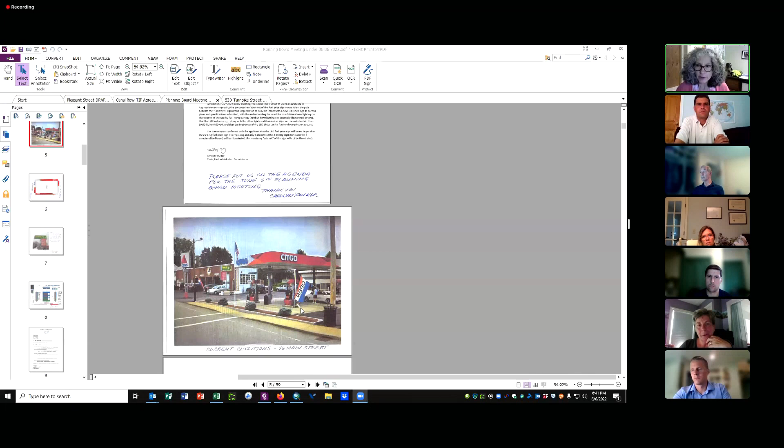So you'll recall in the last meeting, they showed a canopy and showed a rendering or an image that showed this lit up at night, and this was all lit along the top here and really appeared to have quite a bit of visibility. Right, so that's all gone.

And they're replacing this pricing sign, which is set quite far back from the roadway. It's just very hard to go out there and change these prices, especially the way gas prices are changing, he has to get a ladder and all that. And pretty soon you're not going to be able to even find these numbers. Like I said, at the historic meeting, I'm surprised he found 4 4's like that, you know what I mean?

To have this, and now he needs a 5. Oh yeah, the new signs have space for additional digits in case. So this way he can change it from within the building, you know what I mean? And like I said, it dims. If I think they put in, if they feel it's too bright, say there's a 10 being the brightest, you really can't go below 3 or you won't see it. So you have that range if someone goes 'oh my God,' but it can only be dimmed so much.

But now, are any of the existing signs attached to the canopy being changed? Well, it's just a new image. It might look the same to you, but Citgo says it's different. But either way, they're not illuminated. No, they're not going to be illuminated.

Do you have some downlighting? No, nothing. So there's no downlighting on the exterior of the canopy? No, just the existing lights that are under the canopy. Okay, yeah, I saw them the other day. So the illumination will maintain the same illumination that's currently there. Board members, do you have any questions?

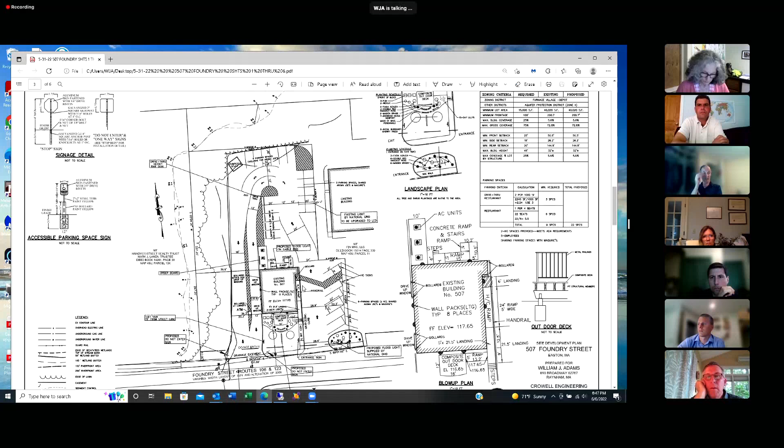I do have the specs of the light we're proposing, and I have submitted them. We're proposing a new light at the entranceway, down on this pole here, which would light up the entrance area. Again, it's an LED, and I submitted a cut sheet for that fixture as well. I can pull it up if you want to see what it looks like. No, that's okay, I think we understand.

Okay, and then on the building itself, there's what they call wall packs—they're like sconces, they shine downward. We have two on every wall, shown on this plan. If you look at the blow-up plan adjacent to it, it's twice the size—right here, to the right, that's showing the wall sconces.

This ramp has a soffit overhang, and we have some recessed lighting in there to light that ramp up. There's also recessed lighting at the entrance and at the rear entrance that lights up the landings and the stairs and so forth.

On the front of the building, we have lights—I don't know the exact name—but they hang down, bell-shaped. Those are shown on the other plan; I didn't get it on the blow-up. Let's go to the other side, same sheet 3, over here. Yeah, just blow up that area.

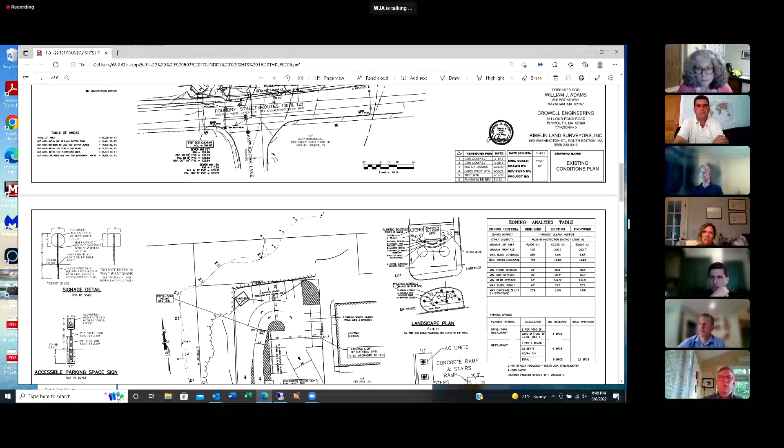Okay, so there are three lights out there that'll hang down and light up that outside seating area. That was one of the things identifying all the light fixtures. Then there are also plantings up in the back—we have the planting schedule, which I also submitted from the landscaping company. I've uploaded that, and they're the same as identified here on the plan.

Then I believe the last thing was there were concerns with the asphalt, so this last plan is a paving detail. Presently, we have this portion removed to put in the grease trap and to take the canopy off, and all of that.

Throughout the property, there's between 5 and 6 inches of asphalt. Any place that there's an issue with any asphalt, I am planning on removing. There's cracks in the asphalt at this entranceway, and they're not cracks through the entire 5 or 6 inches.

They're surface cracks, so I plan on grinding that asphalt and then replacing it. The other thing is the surface that is showing the cracks that Greg was concerned with—I'm not sure he knew that it's only about 3/4 of an inch thick. The rest of it is like 5.5 inches of base. I don't know if it was asphalted twice, or if they just put down this enormous amount of base in there.

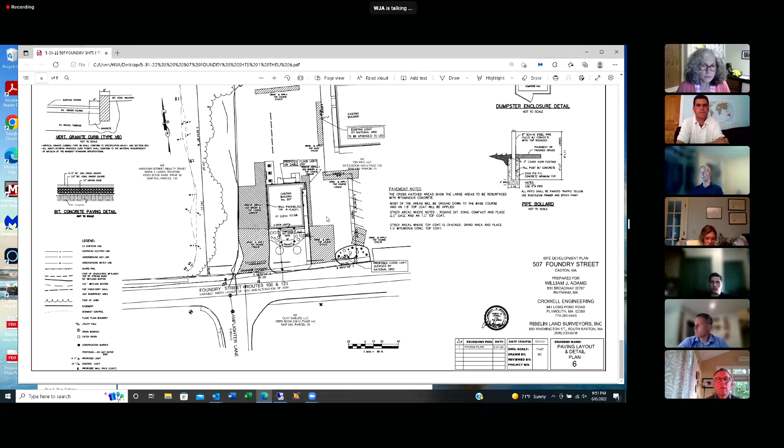But the majority of the blacktop is in good shape. There's just certain areas, so where the hash marks are, we're planning on cleaning that out, grinding it up, and putting a base down, putting a top coat down. If the base is bad, when we dig it out, we will dig out the rest of it. So anywhere that is even questionable—I have over a dozen properties, and I don't let my properties, I don't have them with bad asphalt.

I don't let them get run down and deteriorated. I want my tenant to pay their rent. I want them to do business, and I want the place to look well, look the best it can look. And I think I'm expressing that by what I'm doing for the build out.

I didn't have to do half the build out that I'm doing. I've taken this building and I've increased my build out probably by $100,000, and probably between $200,000 and $300,000 by the end of the day of what I'm doing just to the building alone. So I'm surely not going to allow—I think we're very close here anyway—a pothole parking lot to hinder my project.

And over on this area here, this goes into the neighbor's property. I'm going to fix that property, I'm going to fix his too. At the same time, any place that looks bad on my property, I'm going to repair. If it overlaps a little bit, I'm going to repair that as well.

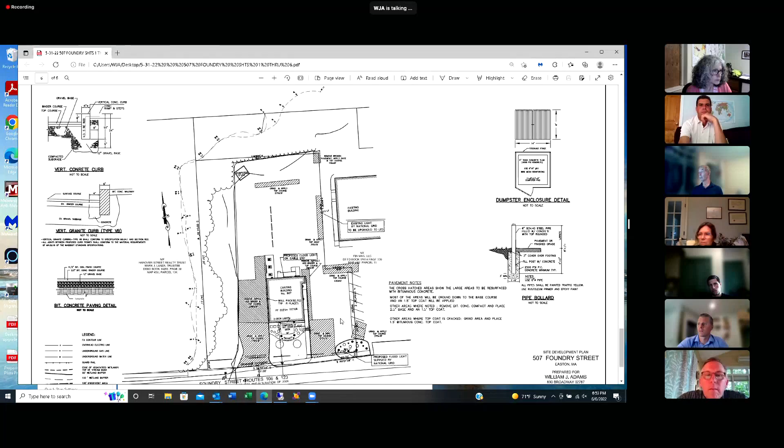Bill and Neil called me or sent me a text this morning and asked me who my asphalt contractor was, that he'd like to possibly do some improvements himself. So maybe he's going to see mine's all nice and new and shiny, and he's going to make his place look equally as well. So that's, I believe, the concerns that the board had previously, and I feel like we've addressed them all.

If there's something else that I haven't addressed, if you could please let me know or ask me, I'll be more than happy, or Bob would be more than happy to explain. Yes, definitely, I think that was most of the items that we had. Yes, so after the meeting we had the location of asphalt to be cut and repaved.

I do have, if you want to see the other planting documents that I have, I had an engineer prepare a photometric plan. May I finish? That, Bill, I have as well.

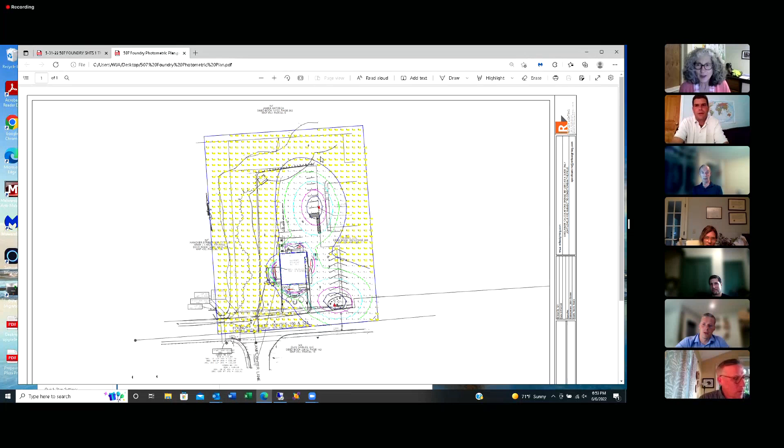No, yeah, Stephanie has the floor. Let's let her—No, I don't think he can hear us. I thought that Greg wanted—

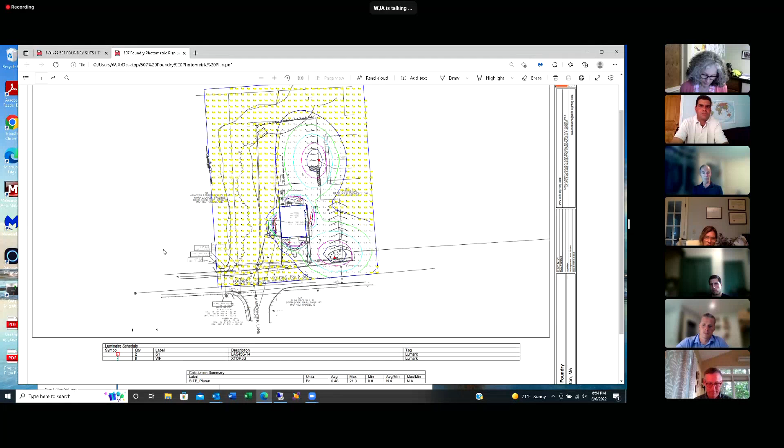I don't know that it was necessary, but I did it anyways, and it shows. Also Greg had said we need to know if the light's shining in the neighbor's eyes. Well, behind my property is all woods, to the left of my property is all woods, and my lights are facing in the westerly direction, so they're not shining in the other property's eyes. And the lights are shining down.

Okay, so I have a question on that, if I may speak for a moment, please. What are the yellow symbols indicate?

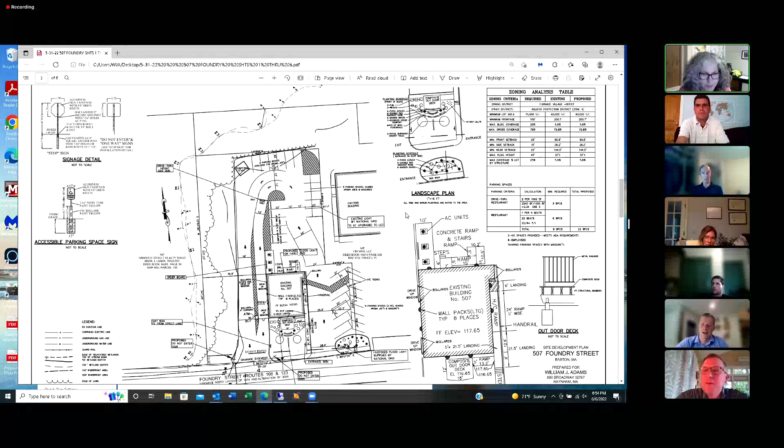The other thing we did was we took the word 'illuminated' off the plan, Mr. Adams—which seemed to be a concern. We removed that wording from the signage. My understanding is the sign company is filing all their permits, and we're going to come before the board for the review of the illuminated signs, and they're also going before the zoning board for a variance that they need.

I just put him on hold. I didn't think he would just continue to talk over everyone like that, but that makes a little more sense that he would—I don't think he could hear us. Bob, yeah, I don't think he did it either.

Okay, so Peter, we provided the applicant with a list of all the items that the board was looking for. I'm not going to go through the whole list—they have all been addressed.

Yeah, that's great. And Bob, do you know what the yellow marks indicated on that photometric plan? Yeah, that's the amount of light that shines on each area. Okay, but I think yellow indicates where it fades out, doesn't it? Yeah, the yellow looks like it's anywhere under maybe 0.2, or de minimis. All right, board members, do you have any questions? 0.0 and 0.1, so Bob or Bill?

Oh, I don't think Bill's with us anymore, but no—oh, I mean, I was just going to release him.

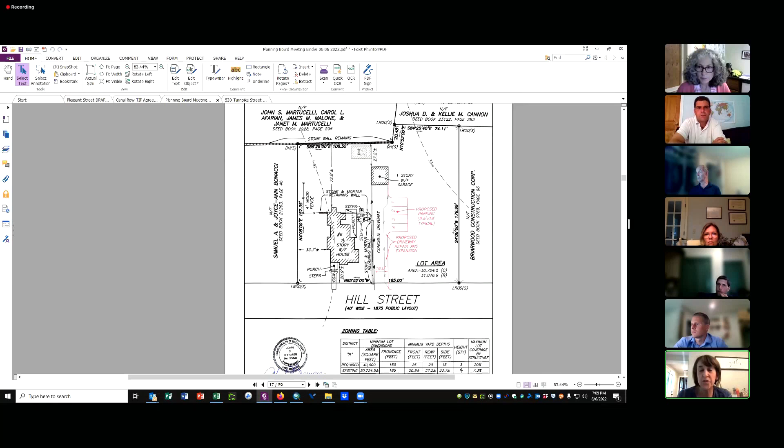Okay, now what were the changes to the driveway? It looks like they've added the parking here off to the side and are expanding the driveway, taking out the shed that you guys spoke about last time. We're just going to remove it, so it's not even an issue.

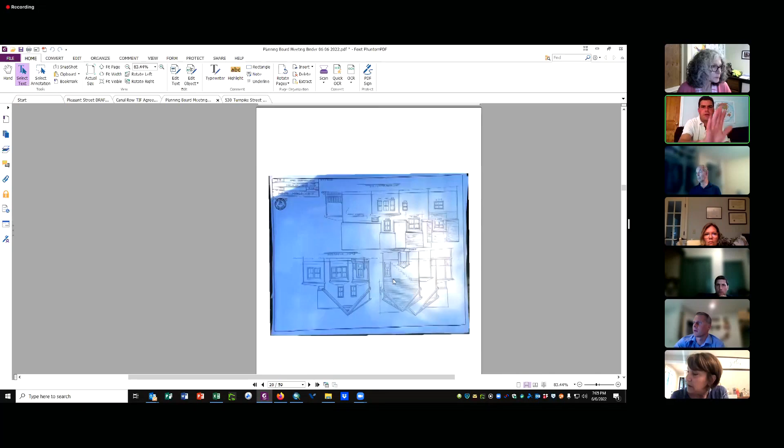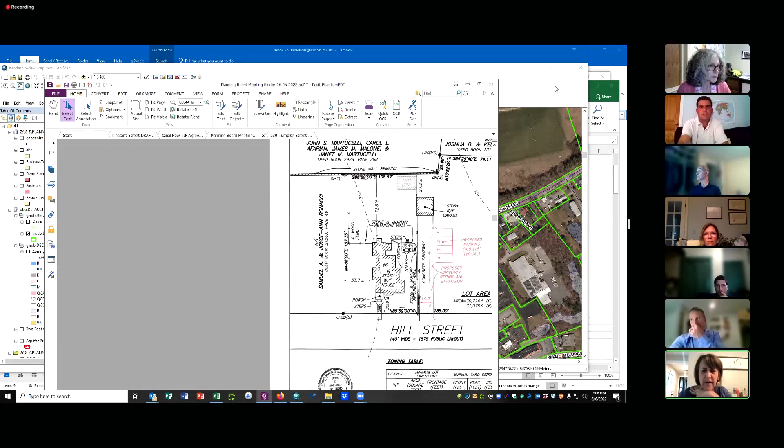Okay. And can you remind us, I could go to my Google map, but on the other side, if you're facing the house from the front on the left, there's some existing trees or bushes over there? Yeah, I think there are some bushes on the left, some privacy between the two homes for sure. And then beyond the parking there's still a lot of grass on the side, before you see the other house. I'm really on the spot here because...

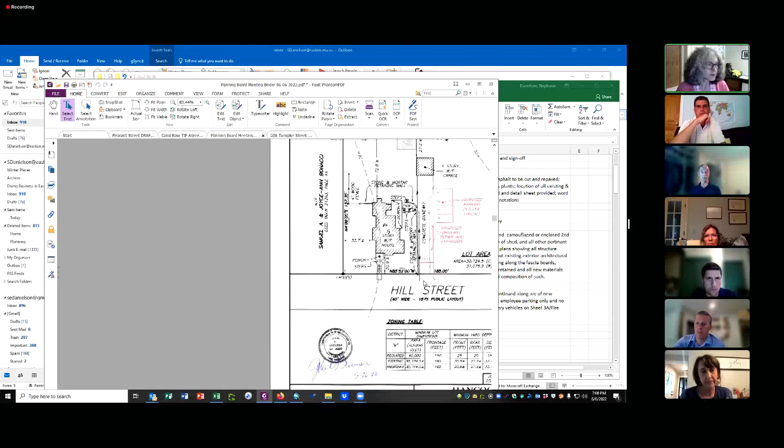So we can move on, and if Nelson comes back he can tell us more. Stephanie, do you have any updates on this? No, they responded to the questions and suggestions of the board. One thing the board asked for was to revise the plans to show the relocation and camouflage of the second enclosed entrance, and we'll look at the elevations in a minute. Also to revise detailed elevations showing all structures, identifying elevations, calling out existing exterior architectural elements such as the crown molding along the fascia boards, windows, wood siding that will be retained, and all other such information.

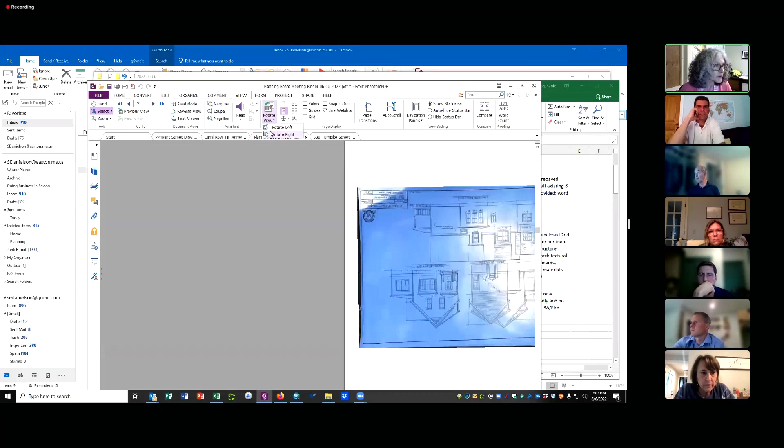The elevation shows some of that information, but it's not there, I don't feel like there's a lot of detail. I don't know if the board had an opportunity to look at the plans. Again, I'm trying to rotate this. Yeah, I did, and I zoomed in, but I wasn't sure, it's a little difficult to see. As you can see, it appears to be a blueprint and a copied blueprint, so it's a little difficult to make out. He's planning to leave as much detail as he can.

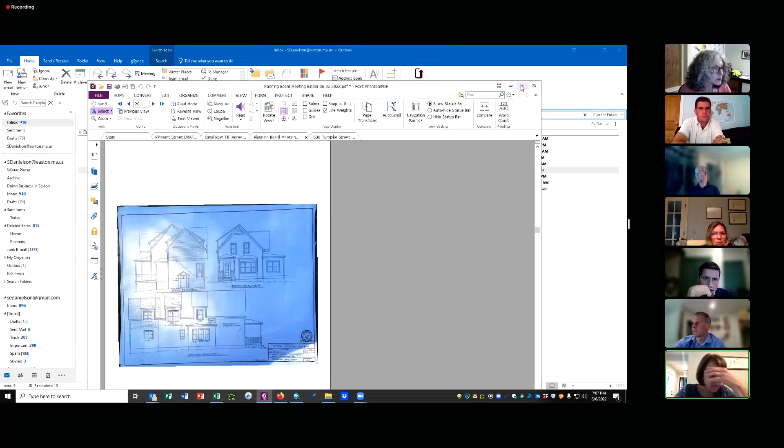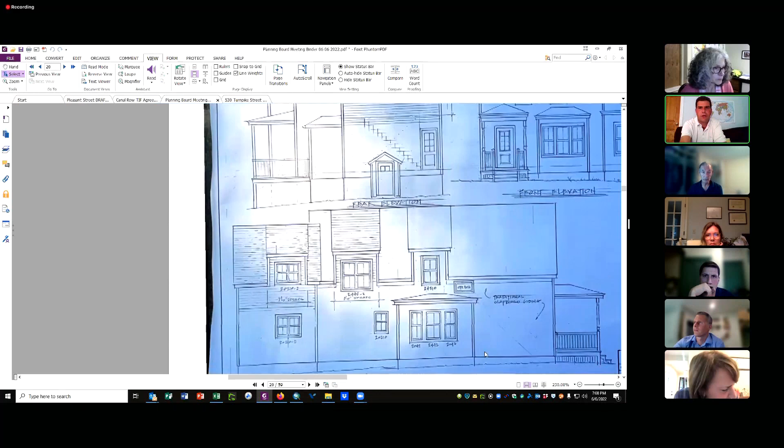With the old woodwork and fascia boards and things like that, are you able to speak to those suggestions, how you're going to handle it, what materials you'll use, or would it be better to speak with Nelson about that? I don't know exactly the kinds of materials he'll use. Well, I think when you look at Stephanie's comments and the historical commission's comments, there are suggested varieties of materials that are options. I'm sorry, I didn't hear what you said. I think looking at the historical commission's comments, they suggested the possibilities of different materials you could use. I'm not sure if you made a decision. Yeah, I don't think he's made a decision because we're waiting for your decision to move forward with what materials he'll use. I really don't know.

All right, okay. Well, board members, do you have any questions, or should we talk about the architectural plans a little bit?

I'm sorry. That's okay, I thought it was pretty genius putting the staircase there, and it worked. That's okay, we're just kind of deliberating here among us, not by ourselves, but opening the floor to any board members.

Okay, so I just got a message that he can do wood shingles and wood siding if that's needed. He says it does say it on the plans, wood shingles and wood siding. He's on speakerphone, so we can find out if there's something else specific.

Mr. Chair, if I may, I know that was something that at least Greg was looking for, and I think other members too. So Pam, we're going to put the wood siding, we're going to keep the same architecture of the house.

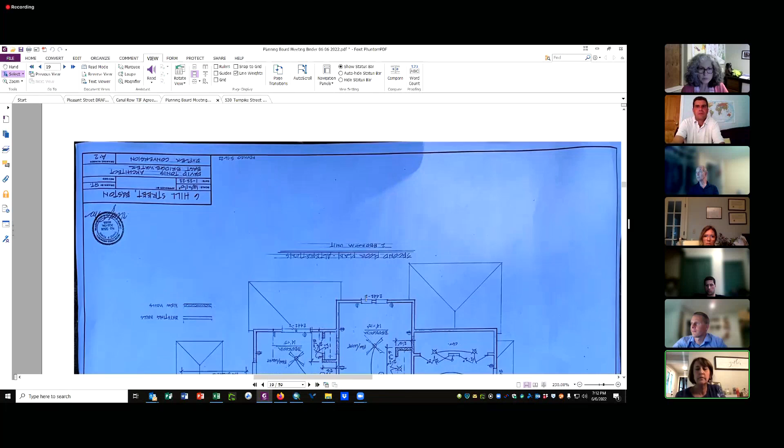Sure, okay, and it looks like your windows will have some sort of representation of window panes, whether or not they're actually paned windows. So right now, the pre-existing windows, some of them are original windows, and some have been replaced with vinyl replacement windows. But what we want to do is put in a new construction window, keep the trim work on the outside the same, and put grid work in the glass to try to imitate the same feature the house originally had.

And then the front porch, the railings and the balusters, are those composite or wood, or what material? On the outside right now, the railings are wood, pressure treated, which need some real attention. So I'm planning on the back going back to pressure treated, just replacing them because they need to be brought up to code. But the front, I'm going to reconstruct that whole new thing with mahogany decking like you used to have, with the railings and everything.

I've actually done one on 42 Columbus Ave a few years ago. I think mahogany, if you take care of it once a year, just brings a beautiful feature to the home. Okay, that sounds nice.

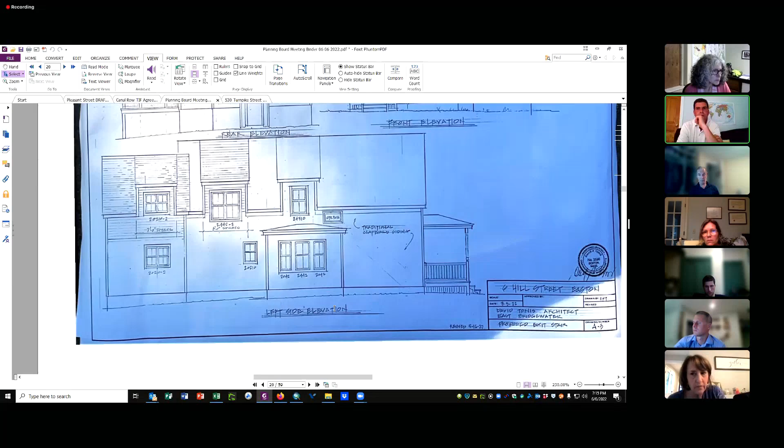But I'm just asking, not just material wise, but the actual structure building. Like, for instance, the addition - I see that the addition is lower than the main peak of the house, but there is no dimension.

Okay, but otherwise, I'm relatively satisfied with the changes made thus far with the architecture.

He's addressed. Wait a second. Nelson, hold on. Can you hear me? Okay, you need to hold on. All right, Deb, go ahead. Continue. So Deb, besides that, I don't even know who was just commenting, but he was trying to address it. Okay, Deb's speaking now, so you can.

Since they're in relationship to some of the materials that were mentioned, it's just that it's not all put in the plan. It looks like there's divided lights shown in the glass, but it's not necessarily called out. So I'm just saying, if we were to make a motion without those notations on there, how do you know that it would actually get done?

Yes, but Beth, just hold on while we're speaking, if you could just wait your turn, that'd be helpful. Thank you.

Yep, I see what you mean, Deb. So what do you think is a better idea? To request more detailed plans, or just add some conditions to any possible approval?

Well, I think ideally in the past, typically I feel like Greg would usually say that we request that information to be on our plan, but again, I'm not sure if everyone feels that it's necessary, or if in our motion we could just...

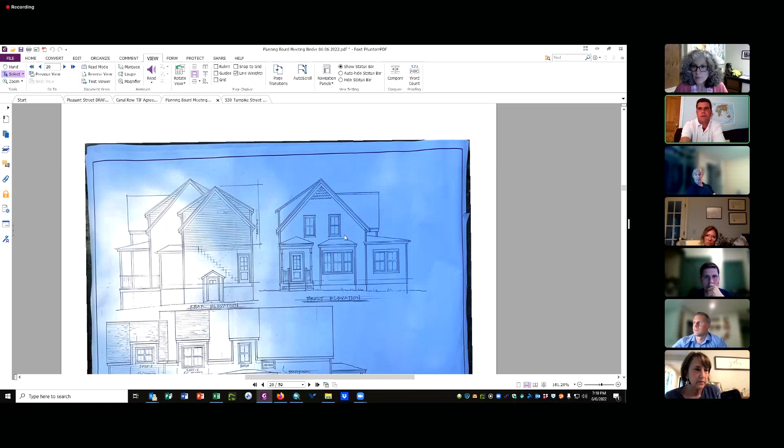Okay, yeah, I think those are some good suggestions. Stephanie, did we have one of the... oh yeah, hold on, let me stop. Waiting to speak. Screen.

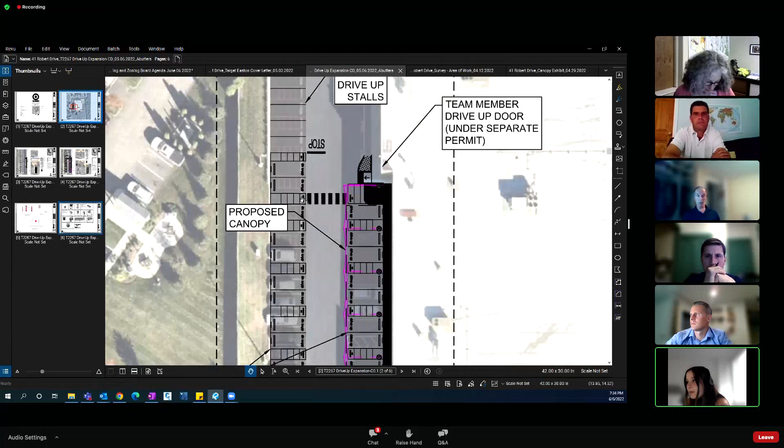This is an aerial of the site, and we did over this so you can see the existing spaces beneath it. There's only a few, and we're going to let it expand down. Anywhere there are spaces no longer going to be used, those will be sandblasted and restriped as standard spaces.

These are the proposed locations, and between every 2 spaces there's this loading area. It's like a walk aisle for the employees that come out and deliver the goods to the cars. This magenta indicates a canopy. It's really just meant for weather conditions and to help protect the employees when they're bringing anything out to the cars, and I could pull up an exhibit so you can see what it looks like.

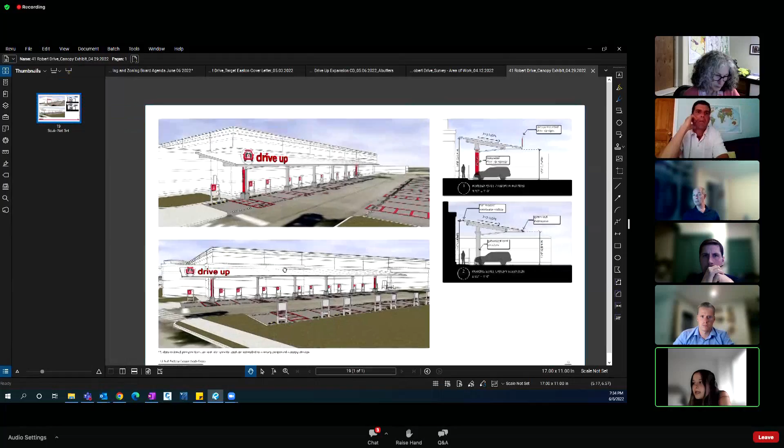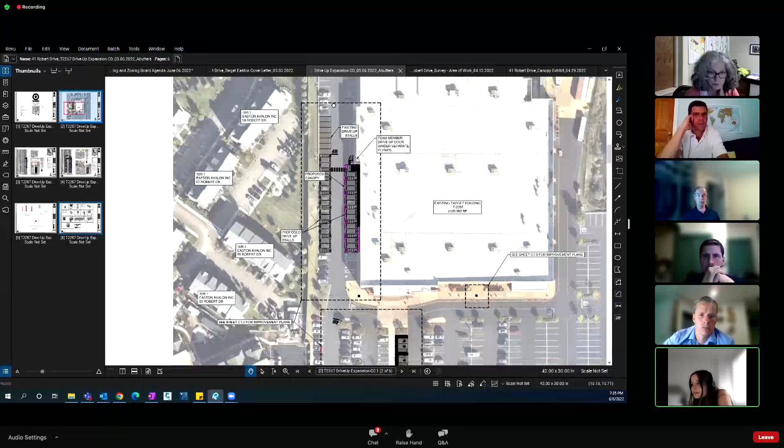So this is just a visual of what we're proposing. There's going to be a drive up sign on it, but Suzanne filled me in that that's something separate I'll have to get other approvals for. But yeah, this is pretty much an overview of it. Sorry, I'm just clicking back to this page. There's going to be all the traffic control that's needed - stop bars, stop sign over here.

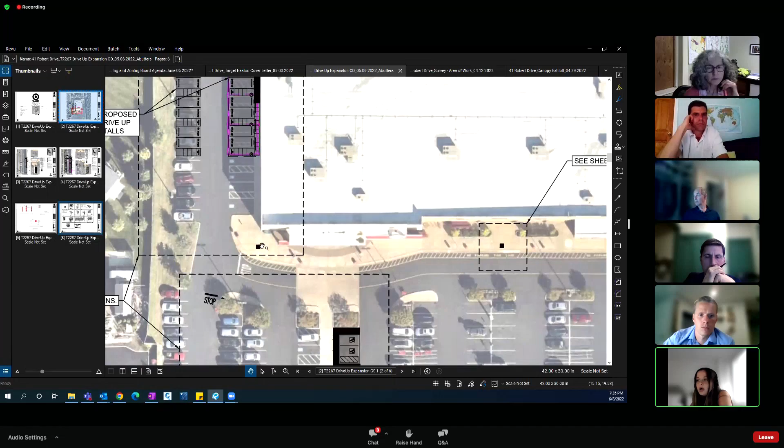And then these 2 black squares represent - let me pull it up - they represent this blade sign. It's actually, this is incorrect, it's not internally illuminated. These are just meant to be directional signs to help customers find the drive up on the left side of the building, since you can't really see that from the road. So these will be at the front of the building.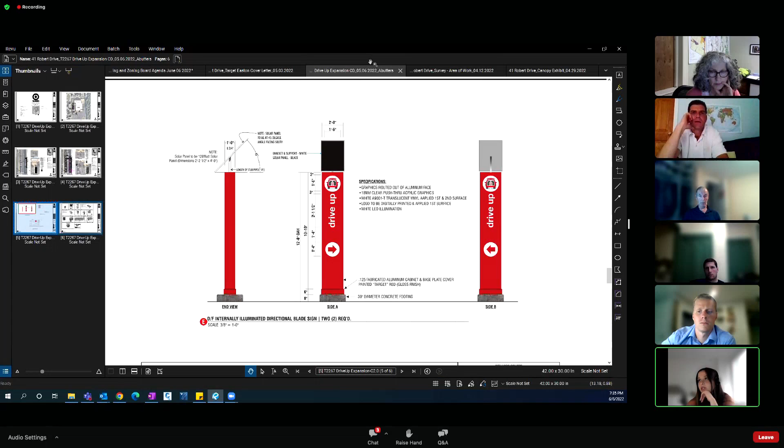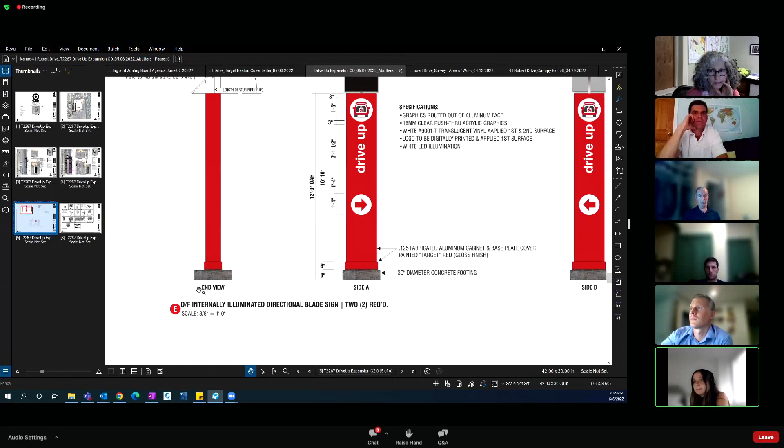And are those drive up signs illuminated or not? No, they're not - sorry, this is incorrect, I just realized, but it's correct in the sign plan that I'll be getting approved later on. But yeah, they're not illuminated. So that's kind of an overview.

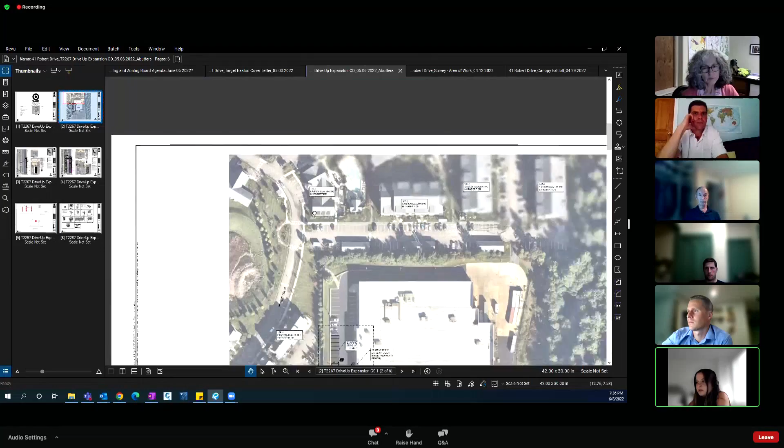Sorry, I'm kind of jumping all over the place. Do you guys have any questions? And just like the existing traffic pattern for that section remains the same, right? People just pull in and pull into a spot, and then they go the opposite way to exit, right? Yeah, so it's about a 2-minute turnover rate once you actually pull into the space.

And do you have the new ADA parking spots on the plan? Yes. Okay, right. So they're going to be moved over here. This is the existing landscaping right now, and they're going to put the ADA spots here.

And then the previous pickup area is just going to be restored to the original parking. It's over to the right, the existing pickup spot. Isn't the existing over to the right? The one time I went there, I had to wait a while. It was over to the right.

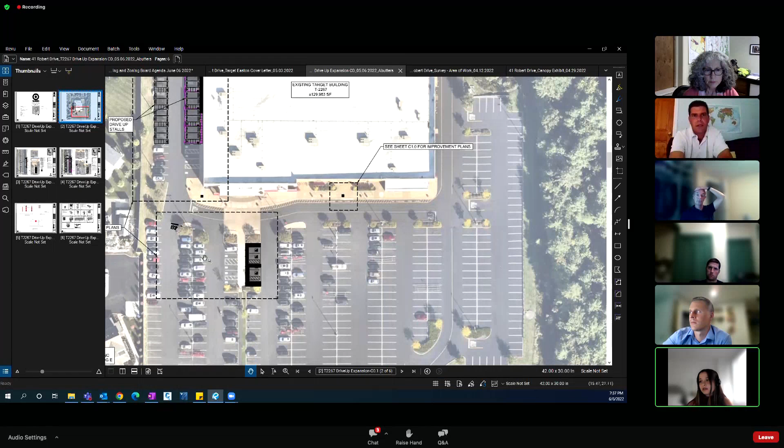Yeah, but maybe more than one spot. It was sort of right. Right around there, but in those parking areas there. Oh, no, well not there. No, not in the front, like to the right of the front. Now you go over a few inches - like over here, you're saying? Up, all the way to the other side. Yeah, right around there, towards the front ones.

That's where we went and they dropped it off, but looks like you're stating that those will be restored to regular parking spots. Yeah, there's none there existing that I know of. I don't believe there are, unless maybe there's 2 targets in Easton - this is South Easton, so I'm not too sure, but these aerials are usually pretty up to date because we use a special... sorry, what was that?

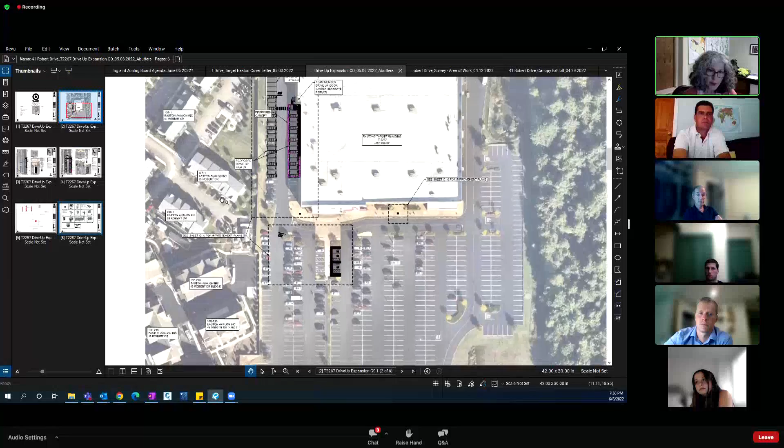We can go with this. Stephanie, did you have some comments? I did have a couple. One, they used the aerial, so it made it a little hard to read, but they did not identify the abutters. I talked with Casey about that - I think she was submitting a revised plan that showed the name and address of the abutting properties. Yep, I can see that there. I resubmitted them, so yeah, we threw them all in. And then, let's see.

So on the signs, I did not pick up that the plan showed that they were illuminated. I think we need to see that eliminated from the plan. Casey acknowledged that she knew she needed to, when they submit their sign application, if they were illuminated, that would need to come to the planning board, and you're limited as to the number. Casey also acknowledged that the canopy sign.

I don't know if the zoning enforcement officer would consider that another wall sign. I think a case could be made for that, but that's for him to decide. So I would suggest you check in with him, Kevin Griner, the building inspector.

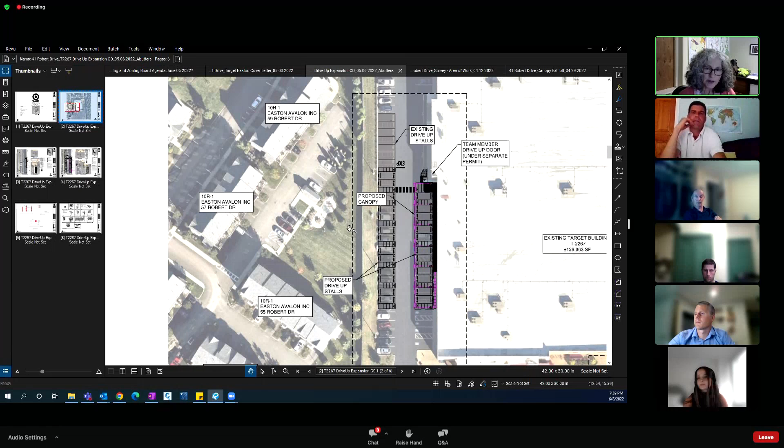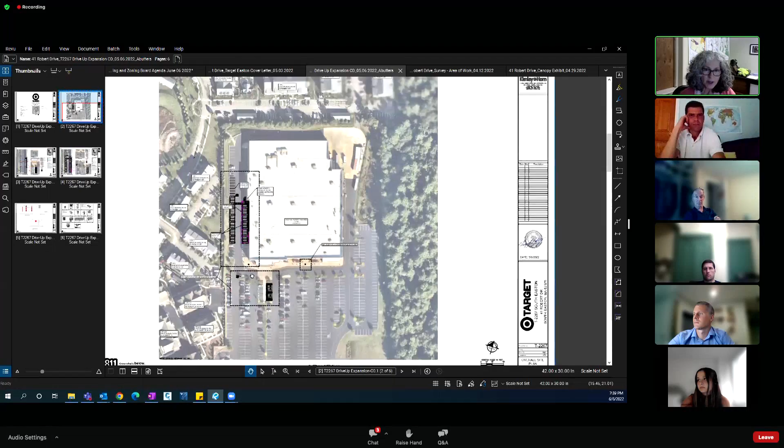My other comment was that they're replacing the ADA spaces that they're losing. They're replacing it where, Casey, if you could show this, where there's some landscape area. I mean, it's really not fantastic as it is, but if you zoom out, there's very little landscaping on this property, and I'm not even sure what the lot coverage is, because it's pretty extensive. This was approved many, many years ago at this point. So my thought was, if they feel that's where they need to put those spaces, the board might want to consider asking them to add another landscaped area to compensate for the fact that they're losing that. And that was pretty much it.

There's a comment from Captain Zalo that they would require a Chapter 34 review of the building code to ensure adequate fire suppression. There was a note in the chat that I think there was more project representatives here.

That's the next meeting. Okay, that's the next one. I think they were at the Conservation Commission meeting prior. All right, board members, do you have any comments?

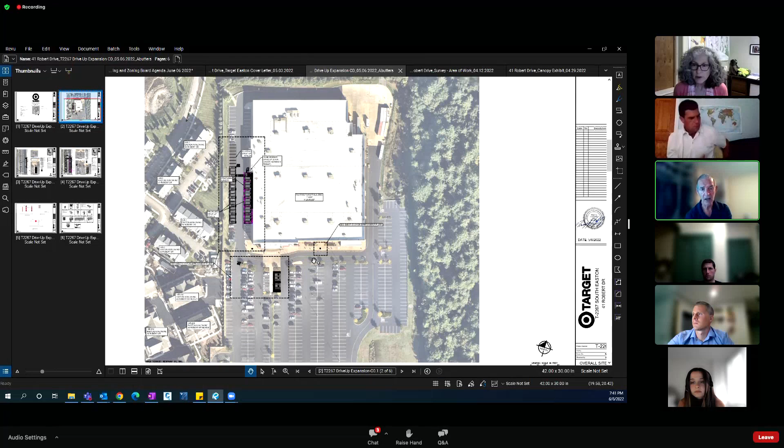I have a question for traffic safety. Is there any additional need for some signs for direction of traffic? It looks a little narrow, with cars in and out both directions. Is there a need? Should the police or someone approve the whatever?

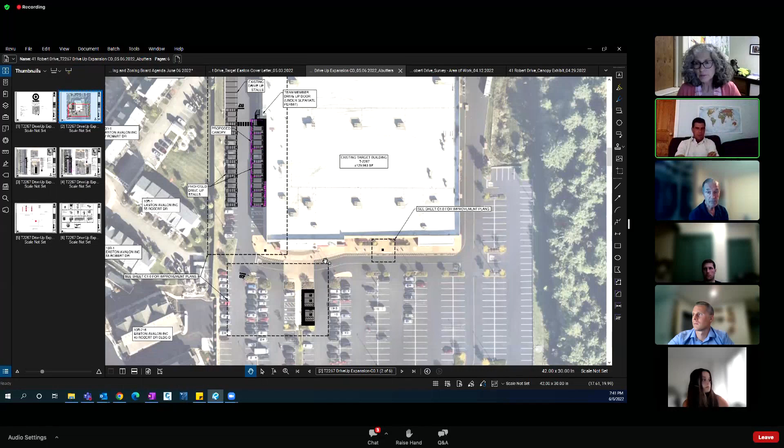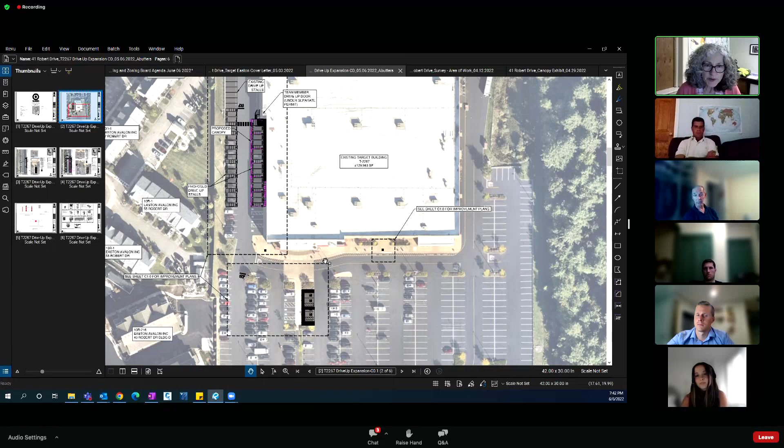I think that's just a typical commercial parking lane, that functions the same as a typical one. So I kind of alluded to that, but didn't ask specifically, but that was my feeling. And if I could respond to that, I looked at that too, and drew the same conclusion, that it's a typical parking lane where someone's either going to pull in, nose in, or back in, and then just back out and return the way they came. These spaces act as standard parking spaces at the end of the day. I think the benefit of this, and why you're losing spaces, is that they have this area between each of the two. That looks like the path where someone's delivering and providing some separation. It's easier to back up. Yes, yep.

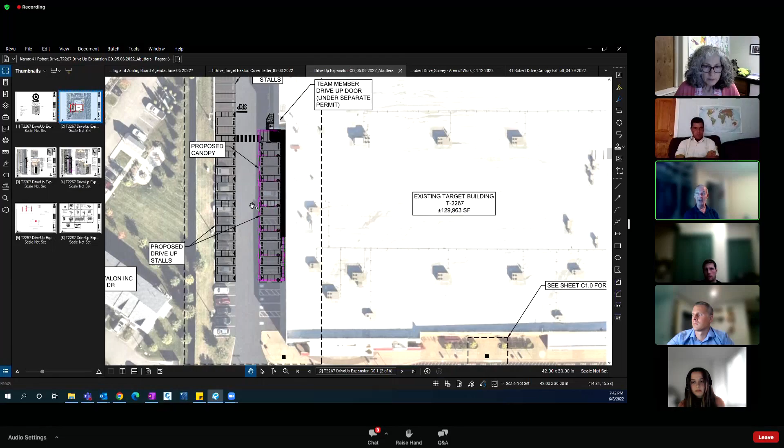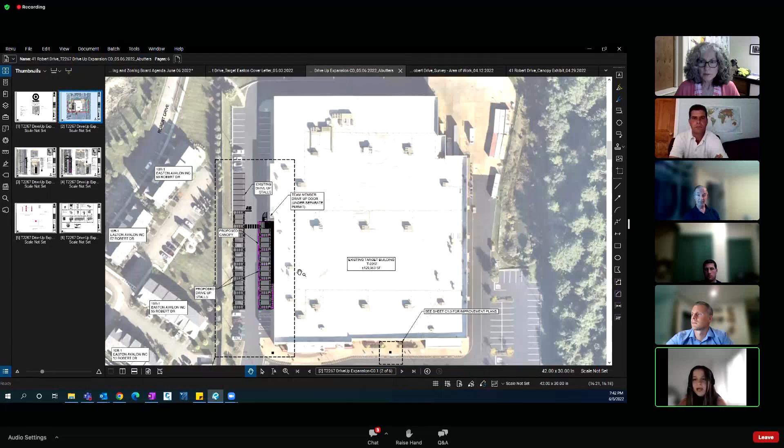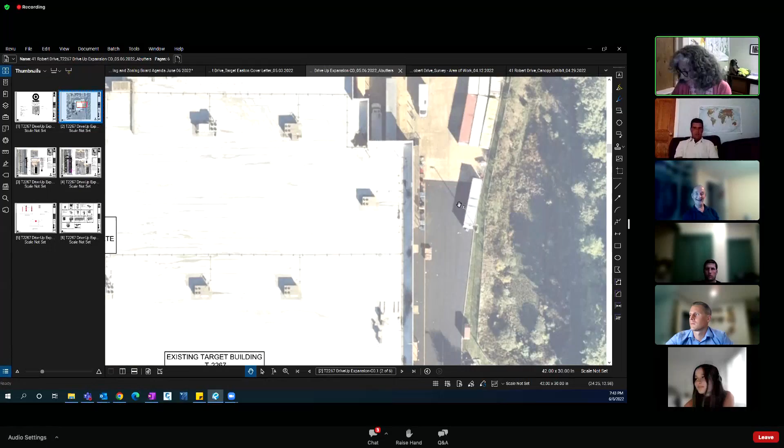One of the reasons I see is if you look at the aerial picture, you can actually enter from the other side and go around the building. But I think there should be signs there that that is not permitted, right? Sorry, what was the question? You were asking if you can't enter from the backside of the building? Yeah, you can actually go around, right? I don't know if cars typically drive around to the loading docks on the backside, but I feel like you could still pull in from the backside as well, especially with signs that say do not enter, loading trucks. It's actually pretty uninviting. I've gone out there to do inspections and thought about driving around, and you can see even from the surface of the driveway that it changes. I thought there might even be a gate there, but it looks like that tractor would be where the gate might be, though it's not someplace that invites you to drive. Yeah, if they ever do it once, they'll probably just go the other way next time. Exactly, they have space to turn around and find the easier way out.

No, I was alluding to signage that will help someone understand. Yeah, and that's also the purpose of these wayfinding blade signs, they'll have arrows on them. They're there at the front drive aisle of the building to help customers find where the actual drive-up is on the left side of the building. And they've seen a lot of success with that.

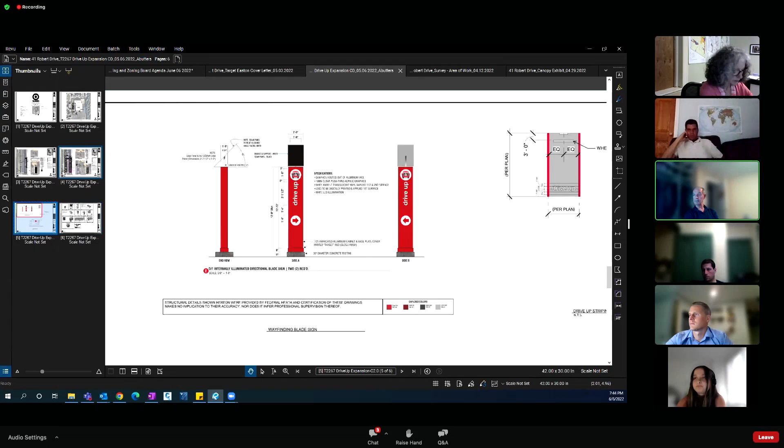So Stephanie, board members, do you think we need to wait for the final plan with these changes, or could we attach a few conditions that the final plan show some of the other details we asked for? I think that would be fine.

I'll definitely get a complete sign package that'll have everything correct in there. I submitted those comments to our sign vendor that we need to get those changes made.

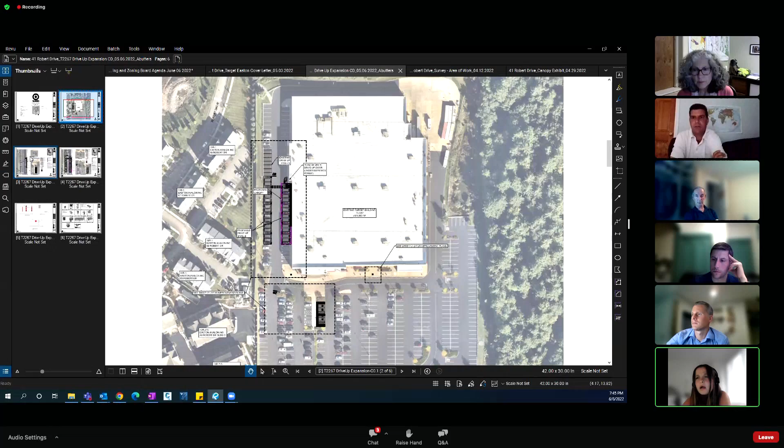We'd be approving the location of the wayfinding signs, right? But not the graphics. And the new wall sign is really its own separate entity, I guess we'll see if it's considered a wall sign since it's on the canopy, not on the building. That kind of starts with the building inspector, who decides how to handle that, and then if needed, it comes to us.

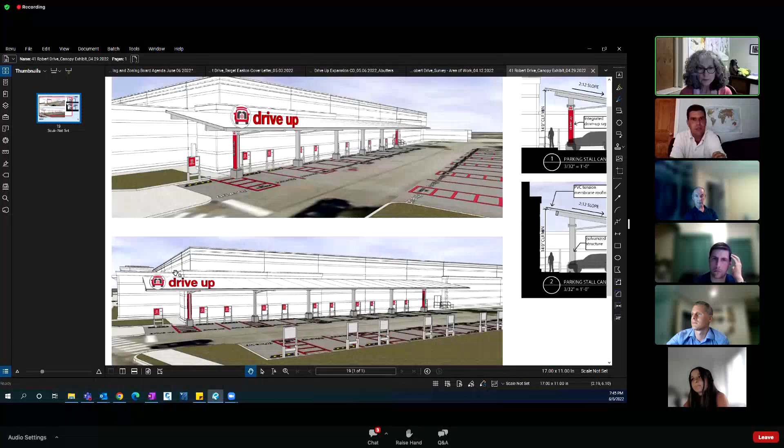Was there anything I need to get from the fire department? I know there was a comment about a potential review, but I wasn't sure what went into that. You or someone from Target needs to contact the captain.

Peter, was the board interested in requiring a replacement landscaped area equivalent to what they're losing? Oh, that can only be a recommendation, right? We cannot condition that. The board can condition that.

Yeah, that's a nice idea. That's a good idea. I think, sorry, I missed that when you were at that point with the ADA spots.

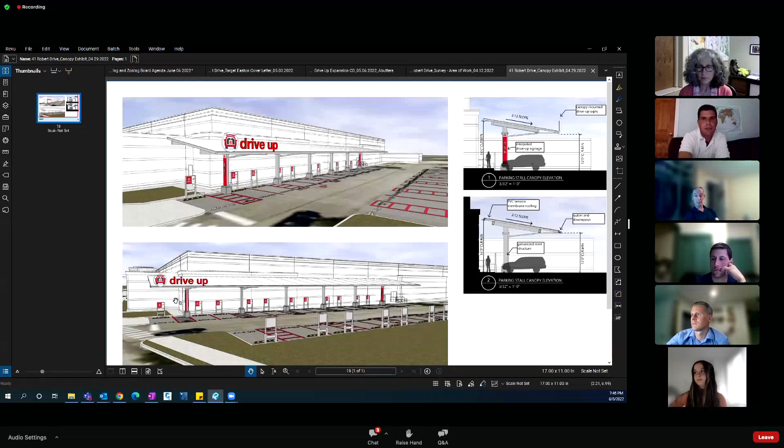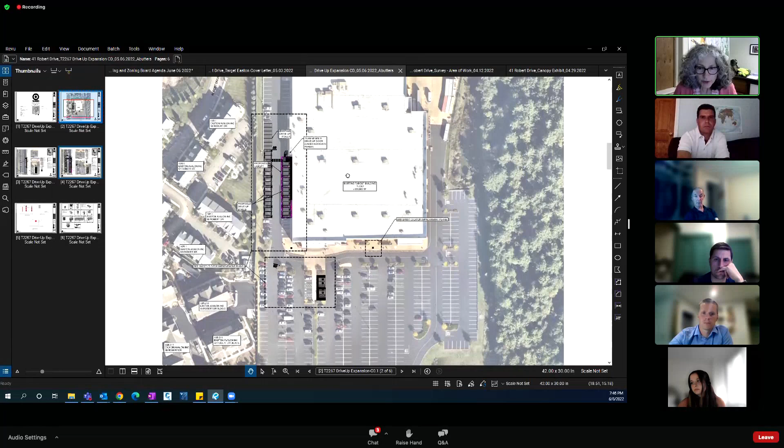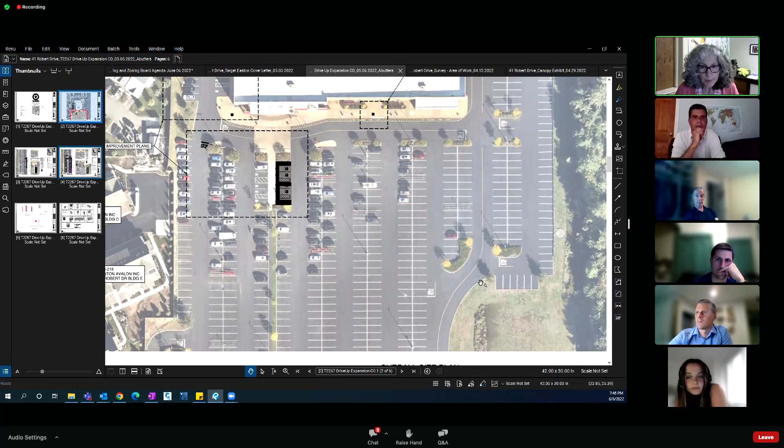Stephanie, did you have an idea on a location, or should we look at the front? There's a lot of opportunity. I think it provides a little more visual relief. Casey, if you could just scroll, make the building go, yeah there - this plan doesn't show fully the entranceway, but you have these long aisles that have no relief.

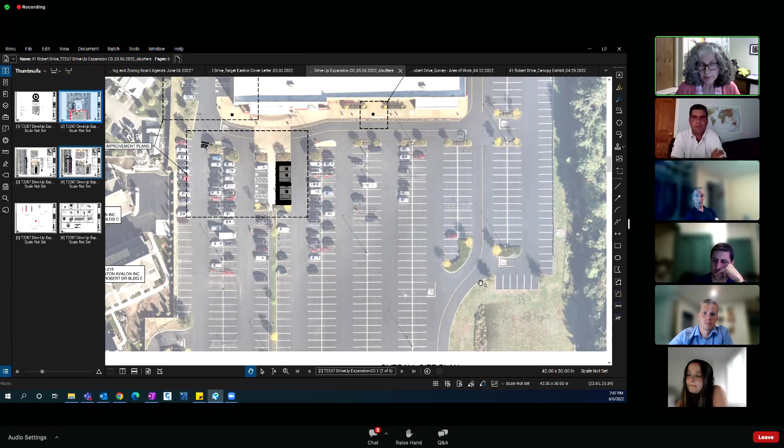Again, the bylaw - I wasn't here, I'm not sure, they may have sought waivers from this. I didn't go to pull the decision, but normally the board would require landscaped relief, so even somewhere breaking up the expanse of the aisle would help, maybe in 2 spots.

I like the idea of breaking up these. Let me see if I can annotate this. Breaking up in here, so maybe an aisle. Really, some more of those spots should have had that landscape buffer, but we're not. Yes, really just talk about that.

Okay, can we zoom in so we can see it bigger? Over here? At the entrance? Oh, at the entrance, yeah, there you go. Even a little bigger.

So what are you suggesting, Stephanie? So this is where you're losing, and this isn't contiguous - there are 2 more of these landscaped rectangles underneath where they're planning to put this additional parking. Here, I'll pull up a better view of it.

Okay, right, sorry. Here, you can kind of see it better. This area that's hatched represents the areas that are going to be removed. Why don't you just move those to some existing parking spots and leave the landscaping - it keeps it so much more simple.

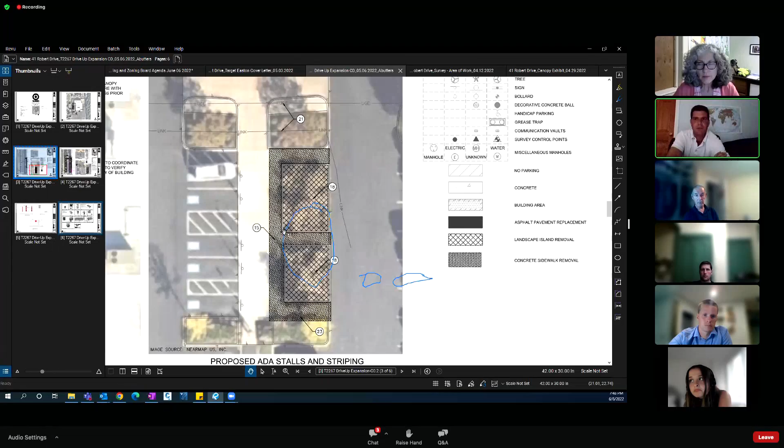That's true, I'm not sure if there's any... it probably has to do with how realistically this area is already ADA compliant. Okay, yeah, never mind. That's true, I think it's the ramp, if you have a ramp. Yeah.

Okay, I like Stephanie's idea of adding and cutting out a few sections a little farther out where the circles, where those ovals were, and putting in some islands. So then maybe around here, so it's consistent, symmetrical, adding in landscape islands here. Is that what we're saying?

Well, where I located it, when you moved the screen, the markings didn't move with it. Oh, yeah, and that's actually better for you - it gives you more spots right next to the building, and then there's just a few farther out. So here, I could circle it.

Before you do - was it any kind of just... I had these probably around here. Oops, you keep moving it. Sorry, I'm done touching it. Okay, oh, in that section - so it kind of lines up with this buffer. Yeah, perfect, yes, that's the text box.

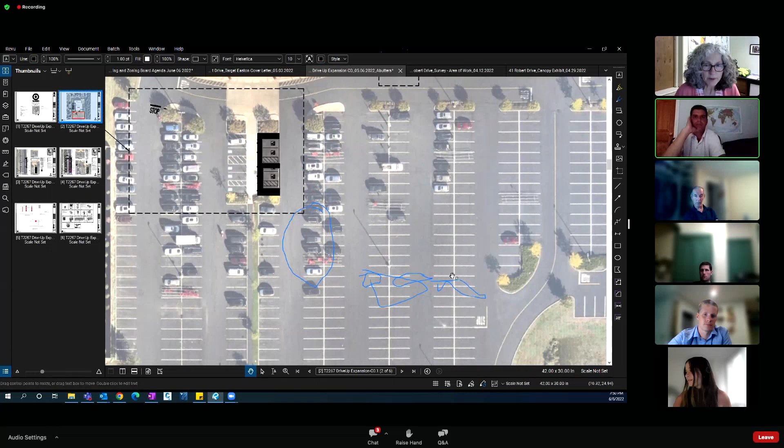So 2 landscaped islands, approximately the size of - well, each island is approximately the size of 2 parking stalls. All right, so about 2 - this is good.

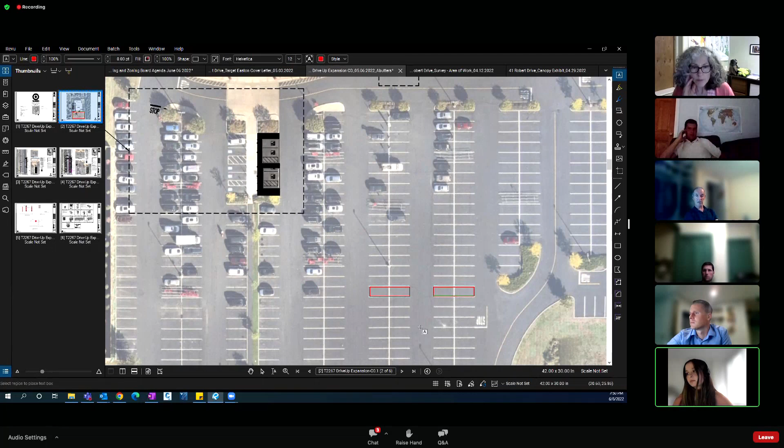I think so. Okay, and then in terms of the type of landscaping, is there a preference on the tree type or anything like that? Native material, native plantings.

And it would actually be nice. I mean, what's there right now are smaller trees. They're not large growth, not tall trees, and some kind of shade tree would really be nice there.

Yeah, but even though it's not completely consistent, at least you're doing a little more than doing less.

We've done things like this in the past, so I'm sure I'll get the okay from Target on this. So if you approve this tonight, Stephanie will just look at the islands and the planting and say, yeah, this is good. I have a couple of small suggestions.

Okay, so you're saying just an approval with conditions. Seems like where we might be going. Haven't heard anyone else chime in, but I'm done for now.

So right now, if there were a motion to approve this, it would sort of exclude the design of the pylon signs and the existence of the wall sign, and require a new plan showing the new islands and the planting.

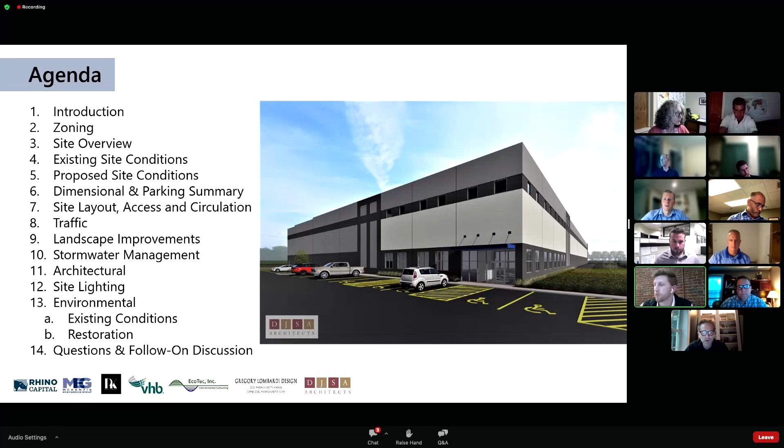So as Rob mentioned, we just want to go over some of these elements of the project from a high level this evening and then answer any questions and follow-up discussion here. So we'll try to move pretty quickly so that we don't take up everybody's evening.

So as Rob mentioned on the line, we have myself, Austin Chartier, our site civil engineer, Matt Keeley, our traffic engineer from VHB, Bill Madden, our landscape architect from Gregory Lombardi Design, and Scott Morrison, a wetland scientist from EcoTec.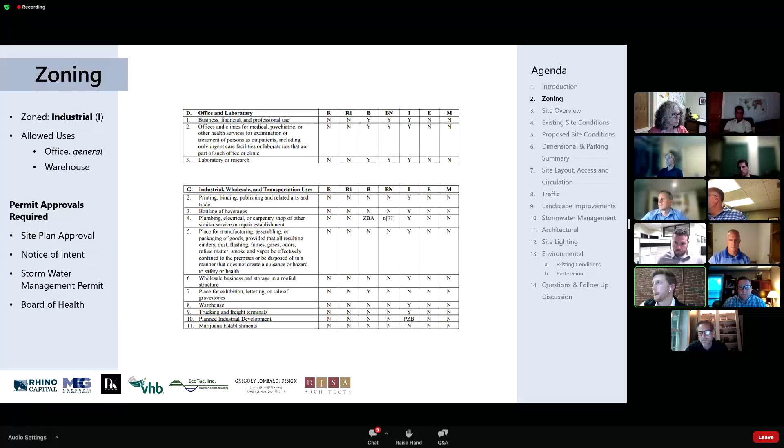As Rob mentioned, we are in the industrial zoning district. Our primary use for this property will be warehouse with an accessory use of office, both allowed uses within this zoning district. We'll be seeking site plan approval from the planning board, a notice of intent from the Conservation Commission, a stormwater management permit, and we'll also be proposing a septic system with the Board of Health.

Just a little site overview here. What you're looking at, the outlined blue line, is 530 and 550 Turnpike Street. It's two parcels totaling roughly 79 acres. This property is about a half mile from the intersection of Route 106 and Route 138, and about a mile and a half to the Route 24 interchange.

From a high level, the vast majority of this project we're not really proposing any work within. Roughly 50 acres of the property is within a wetland area, and roughly 72 acres falls within a natural heritage rare species boundary, representing roughly 90% of the total acreage on the site. Our work for this development will be entirely outside of that priority habitat area, meaning we'll be operating in less than 10% of the total site area.

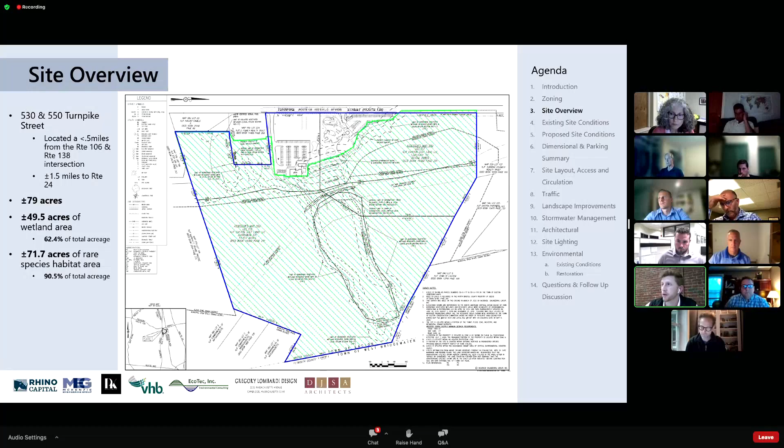We will have an element of work proposed within the natural heritage boundary, but that work is actually restoration, which is a benefit we're providing, and we're really excited about restoring that driving range area. Scott Morrison just went through it with the folks on the Conservation Commission and is also going to be joining us this evening, and we'll be touching on it.

So existing conditions of the site, zooming in a little bit here, as maybe some of you are aware, it's an existing driving range with some supporting buildings: a pro shop, a teaching area, maintenance shed, batting cages, snack shack, mini golf course, and associated parking—roughly 181 existing parking spaces and approximately 4.5 acres of existing impervious area.

I will turn it over to Austin Chartier, our site civil, to talk through some of the proposed site conditions here in front of us.

Thanks, John. For the record, Austin Chartier with McKenzie Engineering Group. I can just quickly touch on some of the proposed features here. As John mentioned, we're proposing just over 100,000 square foot warehouse use with associated accessory office area. The office area is about 8,000 square feet, which leaves the remaining 93,200 for warehouse.

The primary design goal when laying out this site was basically to stay away from the natural heritage areas as well as the bordering vegetated wetland. So we looked at what was there today and how we could tighten up the limit of work a little bit and keep what's there, so it'll be a low impact development.

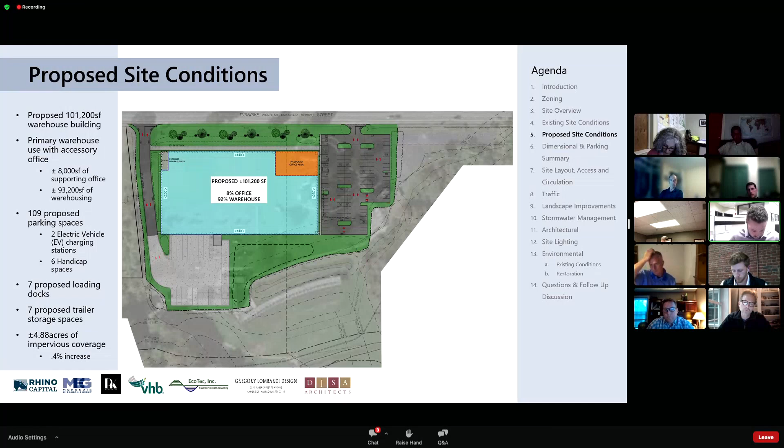But with that said, there is a slight increase in impervious area, and the majority of that increase comes from the building—it's a substantial building. It's actually a decrease in parking; we go from 181 spaces to 109. So overall it's a slight increase in the impervious coverage. Next slide, please.

So as I mentioned, it's fully compliant here. I just wanted to highlight a couple things. The front yard setback is 50 feet minimum, and we're proposing about 70 feet, actually 69.9. In that front buffer, we're proposing a water quality swale that's going to be landscaped, with some shade trees planted, so it will really create a buffer between the building and the road. That came up in the preliminary design review meetings as something they might want to see.

For the parking summary, it's just a quick calculation: basically one space per 500 square feet of office and one space per 1,000 square feet of warehouse, giving us a total of 109 spaces, which we are providing. We didn't want to go over that, because I think this will be ample parking in general.

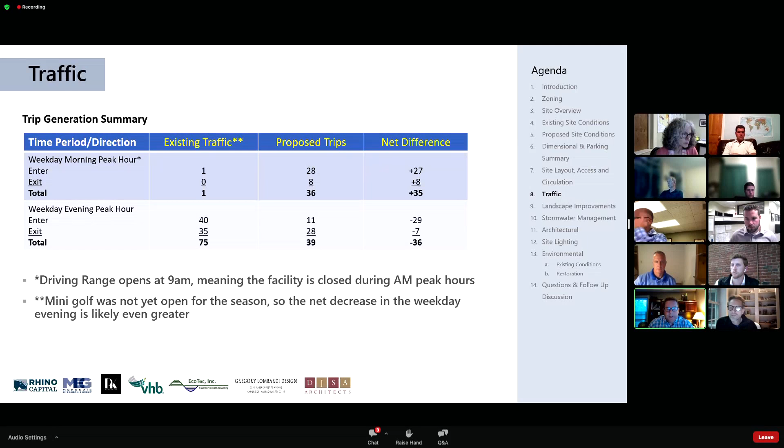So we're expecting a net decrease in traffic during that weekday evening. And I think it's actually going to be a little bit more of a decrease, if you factor in the fact that the batting cages and mini golf weren't operational during our counts.

Next slide, please. In terms of our site access evaluation, we reviewed the MassDOT crash data and it showed over the 5 years there were a total of 6 crashes along the site area. Now that results in a MassDOT crash rate of 0.19, which is far lower than the district-wide average of 0.57.

On top of the crash analysis, we also did a sight distance evaluation at each driveway just to make sure sight lines are adequate. And at both site driveways, we had more than adequate sight distance for site access.

So just a couple of conclusions. Overall, it's a low generator of traffic. We're expecting to see a minor increase during the AM peak hour and a decrease during the PM peak. The MassDOT crash history doesn't indicate there's any safety deficiencies, and we have adequate sight lines for site access. Overall, we're not expecting the project to have a significant impact on the surrounding roadways.

And just one final note: we are going to be entering into the MEPA process very soon. So all our work will be reviewed by MEPA and MassDOT as part of that process. And we'll also need a MassDOT access permit, so they are also going to be looking at that as well.

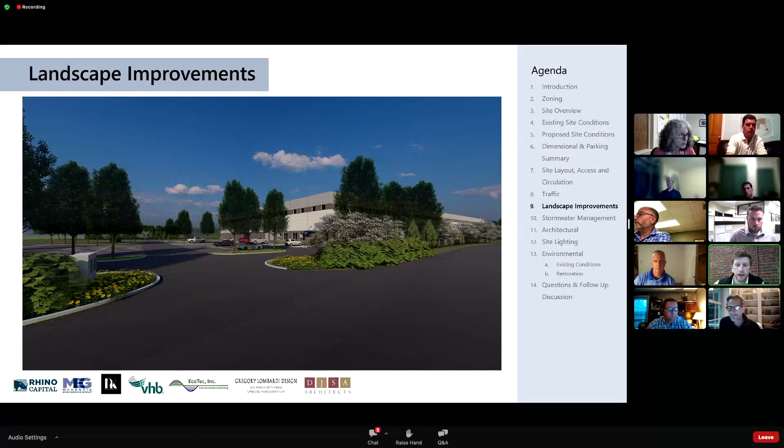Yeah, sure, I can quickly touch on these. The project is fully compliant with Chapter 501 of the subdivision rules and regulations regarding stormwater management for the town of Easton. Essentially, the rules and regulations state it needs to be fully compliant with the stormwater management handbook, so we are meeting all 10 stormwater management standards.

So that was really the focal point for our design today. There's a series of catch basins and a substandard drainage system directly connected to that. It really functions more as almost like a forebay. There's an outlet out of that that extends to the BVW, so it does have a connection to the BVW.

As part of our design, we're basically utilizing one of those inlets to the existing basin as the outlet of our basin. So we're really able to not disturb anything in there and keep it as is. It'll almost be a layering effect - it'll still function as it does today, but we're just going to pre-treat everything and it may get some overflows out of our basin. But so that's no new discharges - that's going to be a decrease to what's going there.

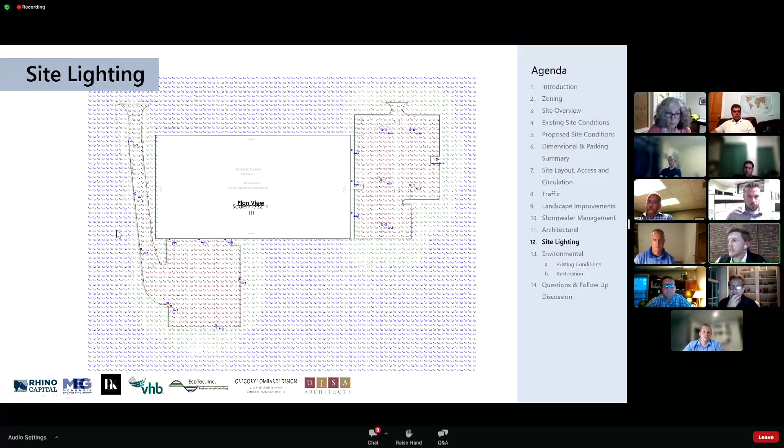Environmental. So this is really one of the elements of this project that gets us most excited. We do have Scott Morrison from EcoTec here, who's going to speak to this a little bit, but we did put in a considerable amount of effort and thought into the positioning and location of this building, such that we were not encroaching upon the natural heritage boundary, which Scott can get into a little bit as well.

We also did notice that there was a substantial amount of disturbed areas within buffer zones, and we just went through this with the Conservation Commission. But again, I will turn it over to Scott. He certainly is more of the expert on this than I am.

Thanks, John. Just for the record, Scott Morrison from EcoTec. So as you saw, we just went through this with the Conservation Commission. The Conservation Commission seems excited about the project itself and the reductions of impacts to the buffer zones.

We show on the next slide, I guess, the biggest impact and restoration we're proposing: the existing driving range that kind of bisects the site and creates a separation before a large expanse of wetlands on either side is proposed to be restored.

So the netting on both sides will be removed, so that acts as kind of a wildlife barrier that will be completely removed. And we've been working with the Natural Heritage Endangered Species Program. There are actually 5 species of concern on the site, so we're working with Natural Heritage to restore this area.

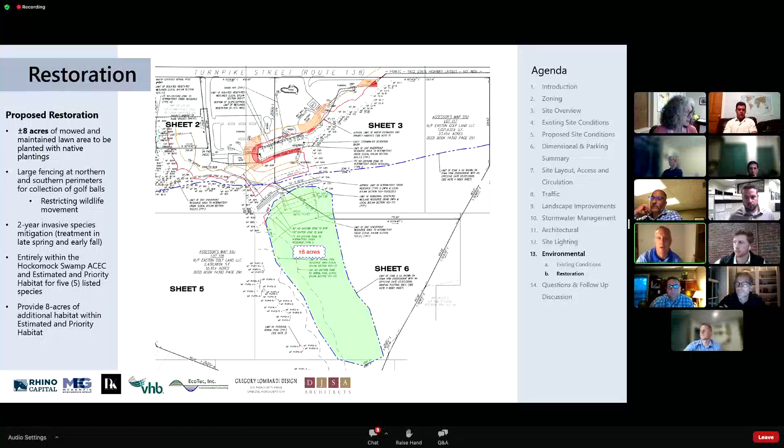So it's a really good project. We're excited to move forward, and we'd be happy to answer questions if the board has any at this point.

Okay, great. Thanks for the presentation. Looks like you've made some progress with the town already, with the staff, and put a lot of work in here. So Stephanie, do you have some comments on this project?

Oh, Stephanie, are you there? I think she's muted. Sorry about that.

I do have a couple of comments. One is, I think this was a pretty thorough application. A couple of things, I don't know if everybody touched on this, but lot coverage by structure should be shown on the site plan layout sheet. And the line of sight should be shown on the plans, although in this instance, it's pretty clear that you have very clear line of sight. It's very linear.

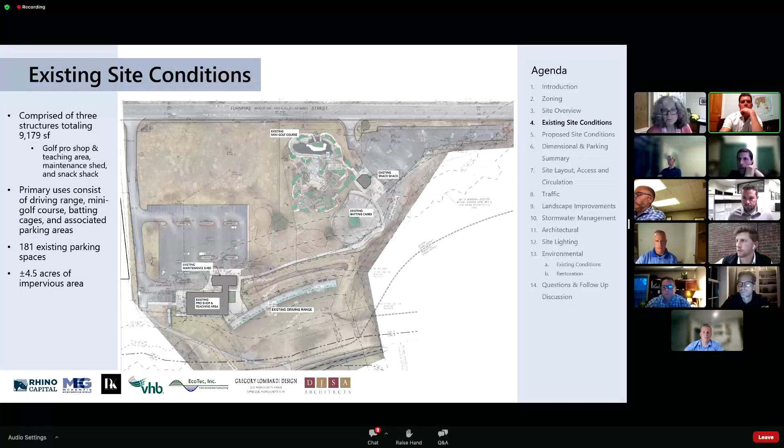I have just a question for Stephanie. Under what circumstances, if at all, would we ordinarily do a peer review of the traffic studies? It would be if the board felt it was warranted. So if the board had any question about the impact of the project on the existing traffic, you could require a peer review.

Well, with all those big trucks going in there, it definitely seems quite different than what existed previously, and it's a largely residential neighborhood, it sounds like. I don't know, I'm just throwing it out there as a point of discussion more than anything else.

So Turnpike Street, the traffic moves along, you don't see a lot of backups. I had heard when one of our prior clerks lived in Taunton that when there were crashes on Route 24, Route 138 would be a bypass road, so it would get backed up during morning hours. Every time I've traveled it, the traffic does move, but it has been constructed to move a lot of vehicles and larger vehicles.

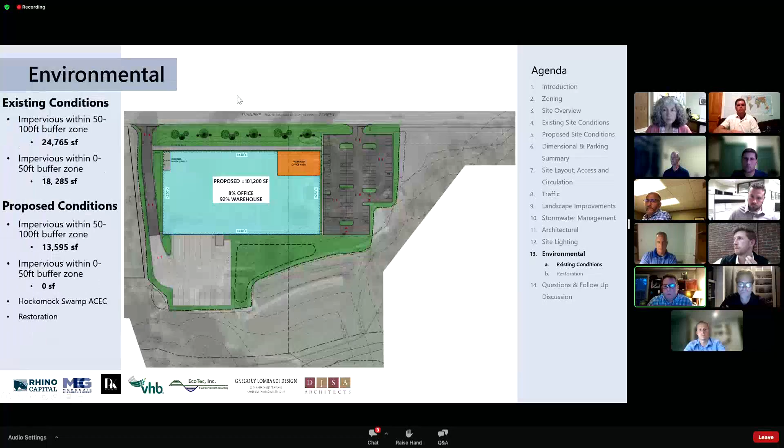Is this just based on expectation that there'll be no night operations, or is this just how warehouses work in general? No, we just typically focus on the peak hours where the combination of site traffic is highest with the ambient traffic on Turnpike Street. That's typically what we focus on in traffic studies. There will definitely be some truck trips over the course of the day, but during the peak hours we would expect 2 to 3 peak hour truck trips.

I think the way I was hearing what Rob from our group was saying was that I remember the intersection was designed for when the dog track could have had some sort of slot machines or something. So the state did a pretty thorough job on the intersection. But I think it's the fact that there are trucks at possibly all hours of the day - maybe it's the volume and the effect on the neighborhood as much as possible congestion at the intersection. That's the way I interpret some of those comments.

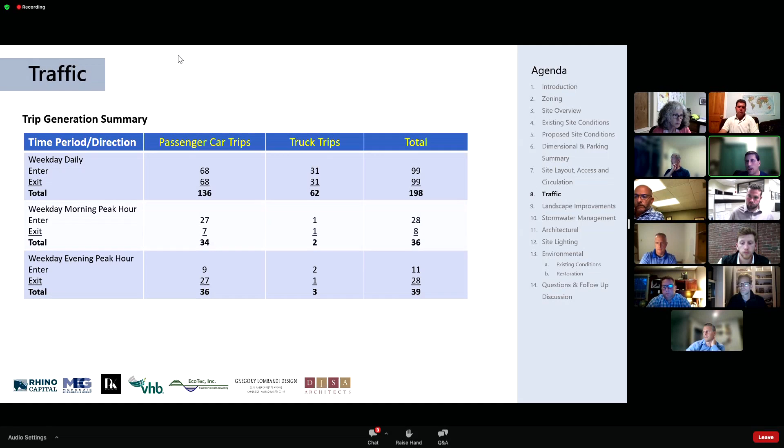Could you just touch on briefly the entry and exit where the trucks are going to go, on the sight lines and basically the turn radiuses coming out, exiting?

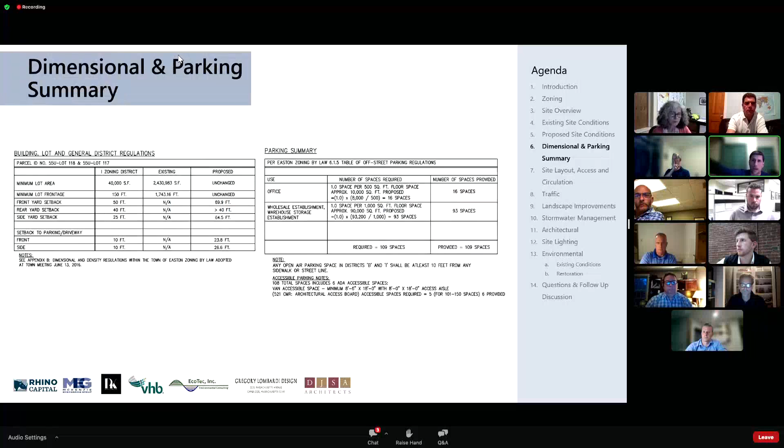At each driveway, we go out and measure intersection sight distance and stopping sight distance. Intersection sight distance is your view as you're exiting the site, looking left and right, and as you're probably familiar with the area, it's pretty straight and flat, so those sight lines are very long. Similarly, stopping sight distance is the measurement as you're traveling along Turnpike Street, how far away can you see the driveway to make sure you can avoid an obstruction coming out of it. With it being straight and flat, those sight lines are more than adequate.

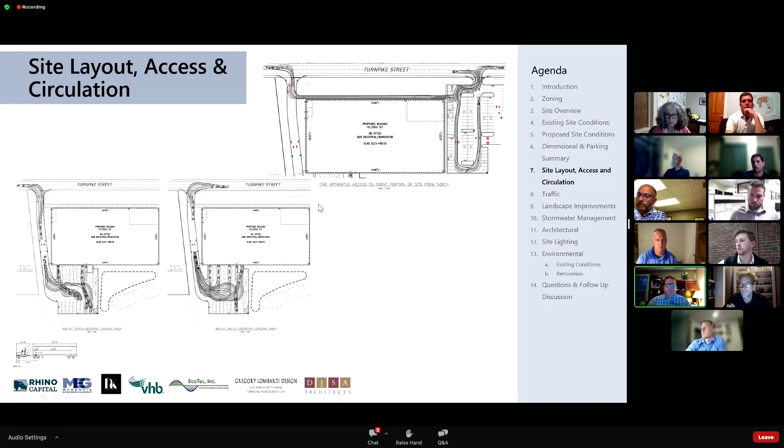Very helpful, thank you. Anyone else have anything to ask or suggest?

So Stephanie, from here we just continue to the next meeting to expect some possible modifications to the plan based on the Conservation Commission or otherwise, and of course, peer review.

Can you ask about the MassDOT and other agency reports that will be generated from the reviews? Mr. O'Leary, would you like to speak toward MassDOT? Yeah, so once we file with MEPA, MassDOT will review all the traffic materials. If we file on the 15th, it's a 30-day comment period, I believe. So we would expect to hear comments from MassDOT in about 6 weeks, I would say.

Stephanie, who should be reviewing this issue from the town? Is that the police? Who should be looking into it from the safety point of view?

Oh Stephanie, you're muted. I'm sorry, do you want me to answer that? You're talking about like police and fire? I think Amos asked the question of me, and I'm sorry I was muted, but I couldn't fully hear your question, Amos. Who is going to review the issues with traffic? Well, we solicit comments from police, DPW, and fire, and they did not have comments on the project.

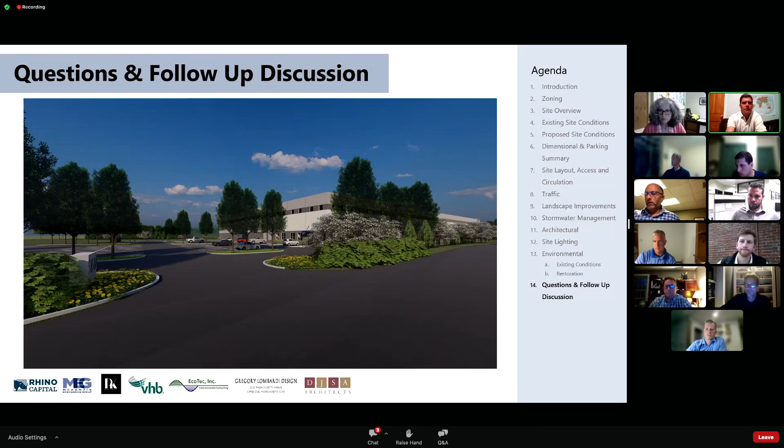Well, the meeting on the 27th is going to be very full. If you want more time, we can, to avoid having all of you come to another meeting where you might have to wait around for a while, we could go out two meetings. It's whatever you want. The other meeting after the 27th, I believe - let me double check.

I believe the planning board and the conservation commission - what do I want to say - they're off schedule, so the meetings are altered. We don't normally have both boards meeting the same night. Oh, I see what you mean. Yeah, whatever, not worried about it. So hold on, from our perspective - actually, never mind. That's not until August. This has been an unusual year.

Sorry to interject, but from a project owner perspective, we would like to continue this process to the best of our ability. There were a few comments we are more than happy to address in the next few weeks prior to the hearing on the 27th. If there is room, we would appreciate the opportunity to quickly introduce the project, since it sounded like a few board members were not present tonight. Hopefully we won't have to go through this same lengthy presentation unless necessary - we're happy to do it again, but can introduce the project to the board members who weren't here and elicit any additional feedback. Obviously that's all pending availability, but we would like to continue this process, move along, and stay in front of you folks as best we can.